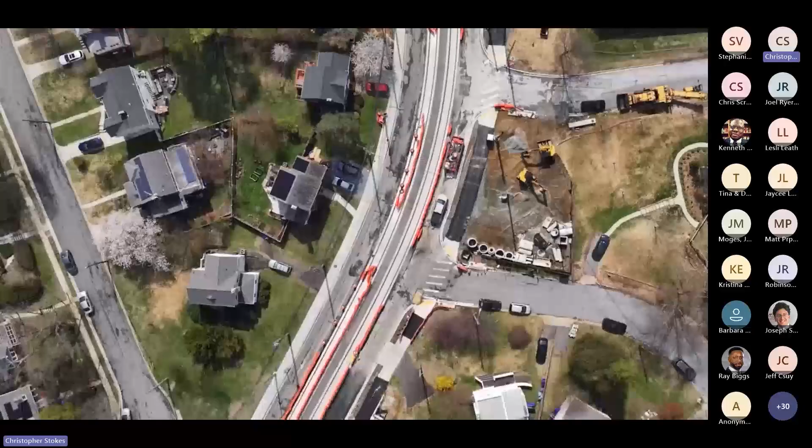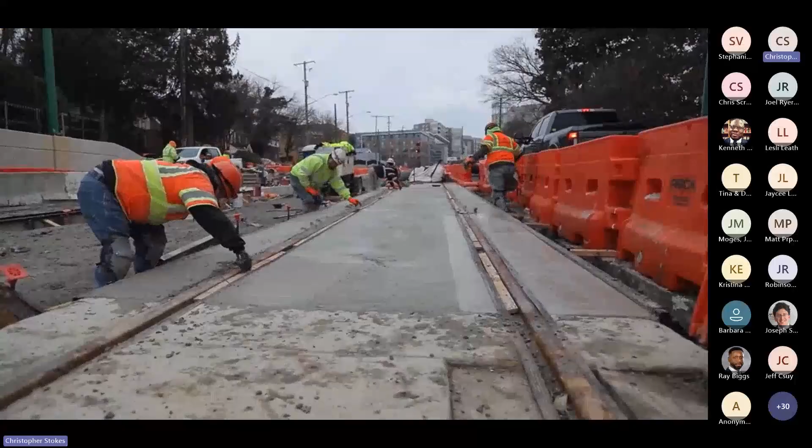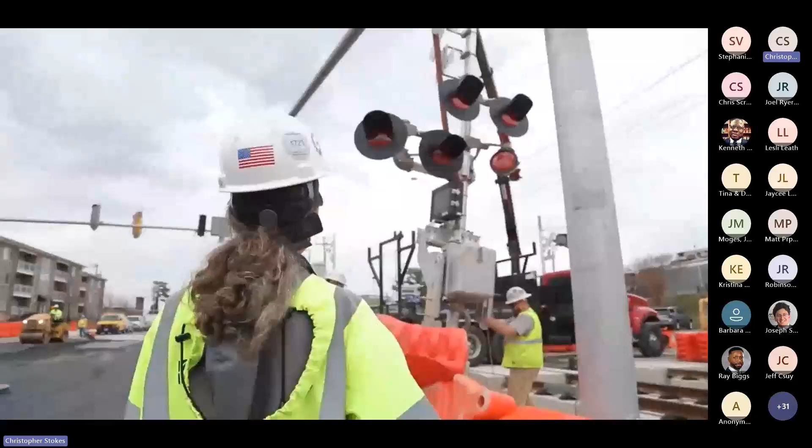Earlier this spring, Purple Line crews installed the final section of track on Wayne Avenue, an important project milestone. With the rails now in place, the project shifts focus toward the systems that power and operate the Purple Line, from the overhead power that energizes the trains to the communications networks that keep everything connected.

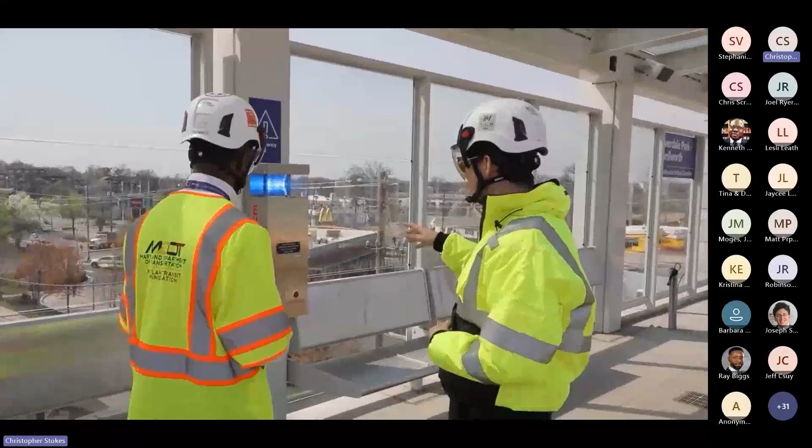This is where the railway really comes together. More than 1,000 live feed cameras, thousands of sensors, and integrated traffic control devices are being installed along the corridor. These systems communicate with stations, intersections, and pedestrian crossings to keep riders and the surrounding communities informed and safe.

Once testing is complete, operators in the control center will be able to see every light rail vehicle in real time and monitor activity across the entire system.

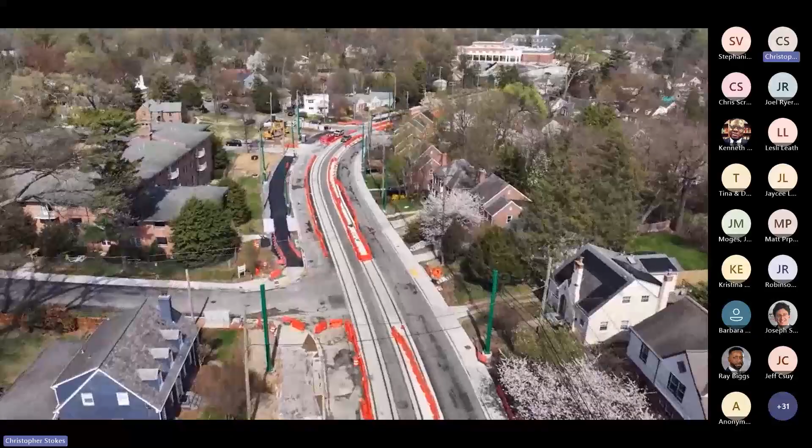Supporting those operations, the Lyttonsville Operations and Maintenance Facility is nearing completion. The facility includes additional storage tracks, maintenance areas for the light rail vehicles, and a backup control center to support trains as they move along the line.

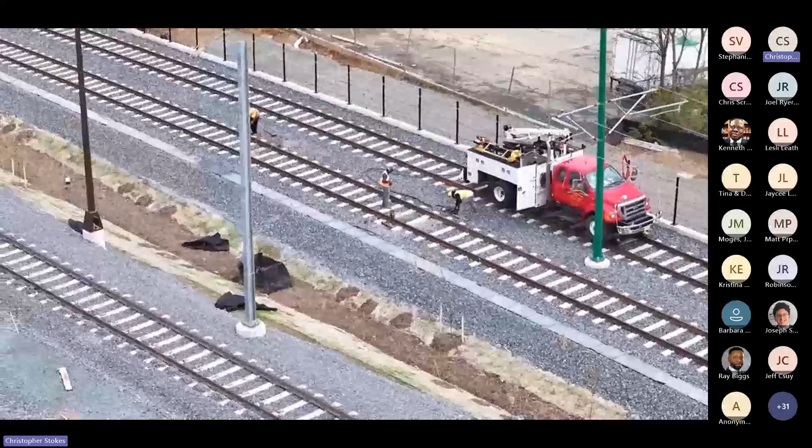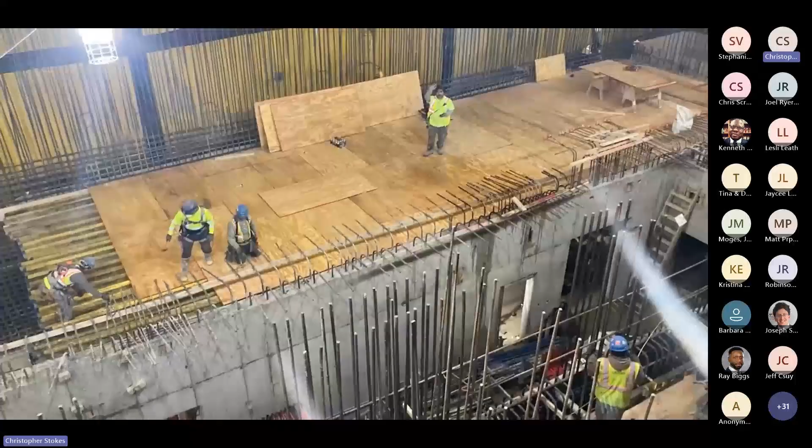In Bethesda, progress continues on the station lobby located just below ground level, as crews place tons of concrete for the elevators and the cavern, preparations are underway for the complex connection between the Purple Line and Metro's Red Line.

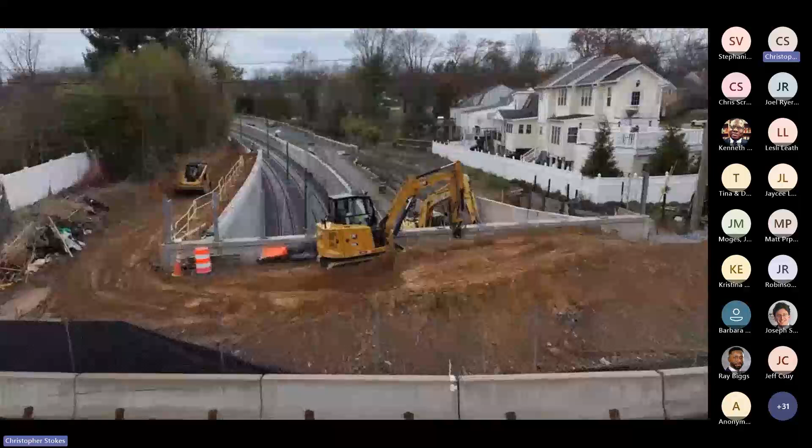Work is also advancing on the Capital Crescent Trail, where crews are constructing new retaining walls, installing drainage, and beginning paving operations between Bethesda and Silver Spring. Across the corridor, crews are also completing sidewalks, driveways, and other finishing touches that reconnect neighborhoods and restore the streets surrounding the new line.

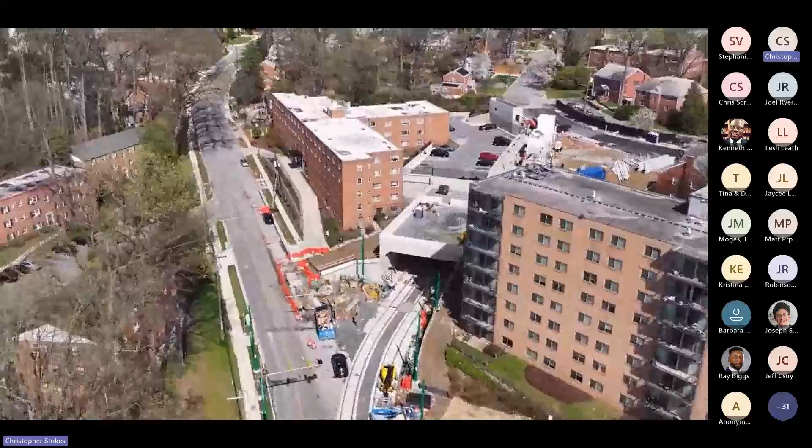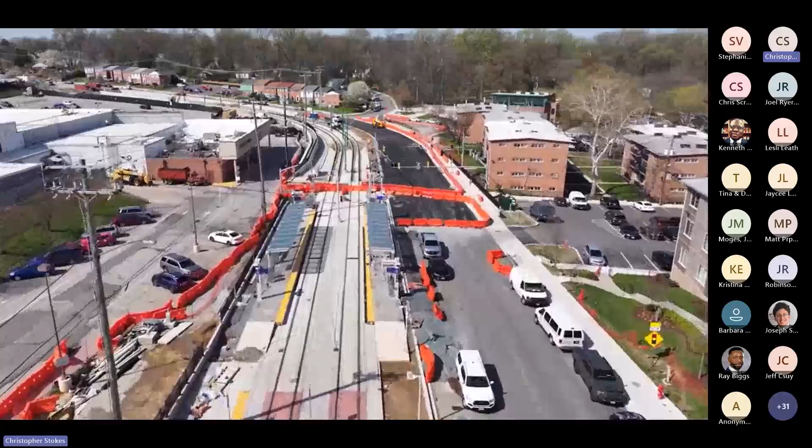Inside the Plymouth Tunnel, track installation is complete, and crews are now installing the overhead wiring that will power trains through the tunnel. With spring growth, the project's corridor will be turning green as crews plant thousands of trees and other landscaping elements along the alignment, restoring the corridor and enhancing the communities along the line.

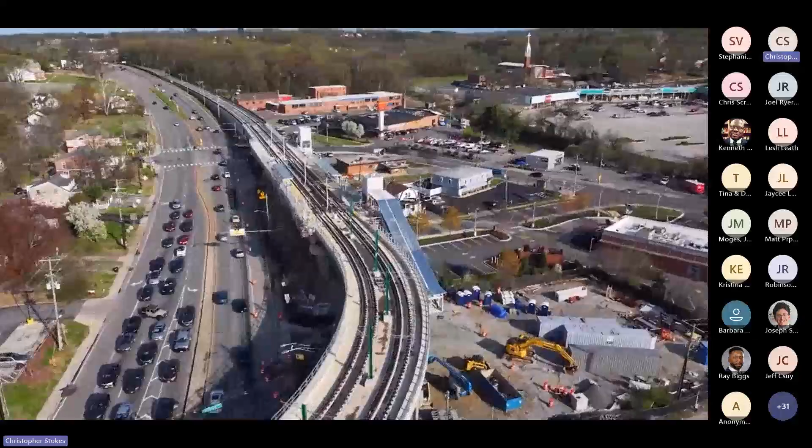Through the University of Maryland and Prince George's County, heavy construction is giving way to finishing crews and the installation of complex systems and utilities. The elevated station in Riverdale now has elevators and stairs in place, signaling its readiness to begin serving the public.

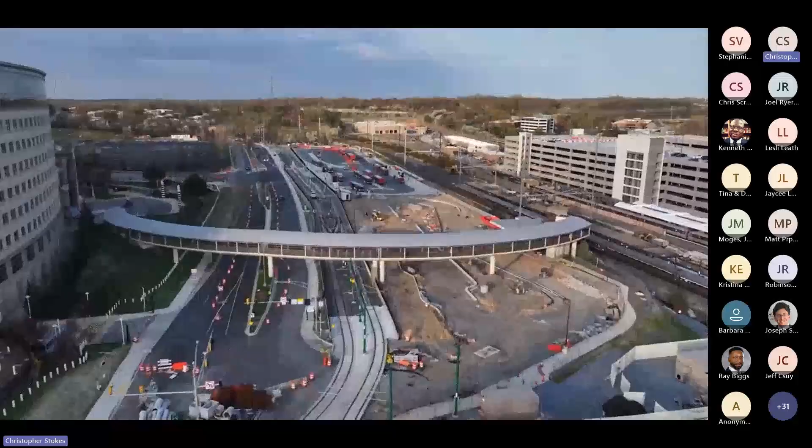At the Purple Line's eastern terminus, crews are also applying final finishes, and construction along Ellin Road is nearing completion.

Meanwhile, system testing continues along the Purple Line. Light rail vehicles have already traveled from New Carrollton to the University of Maryland campus, and testing will continue along the entire corridor in the months ahead. Testing typically takes place at night and is supported by maintenance of traffic teams and local police directing traffic to help keep everyone safe.

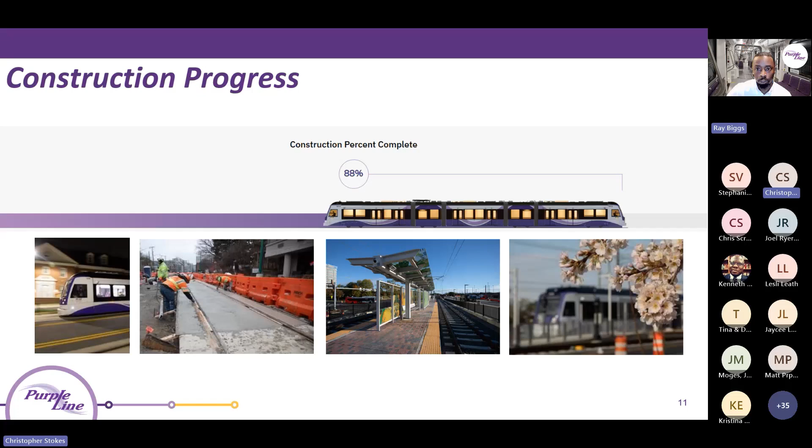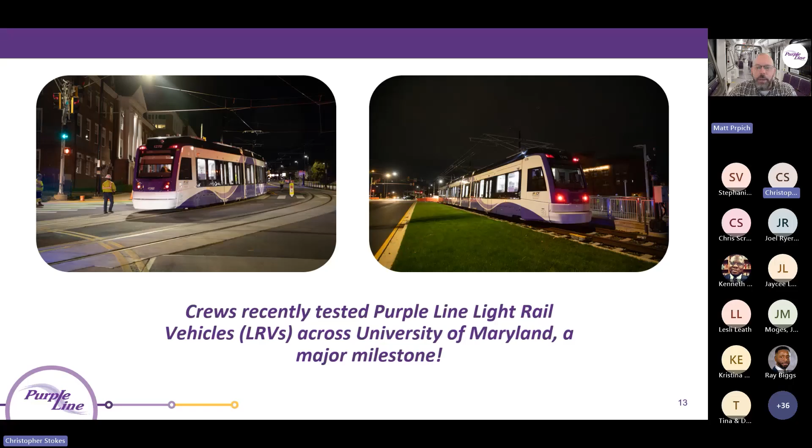Thanks, Ray. Good evening, everyone. Happy to share some slides of some testing and progress updates here. Some great photos of our testing on the University of Maryland campus. Very exciting time for the project to move the trains through the campus.

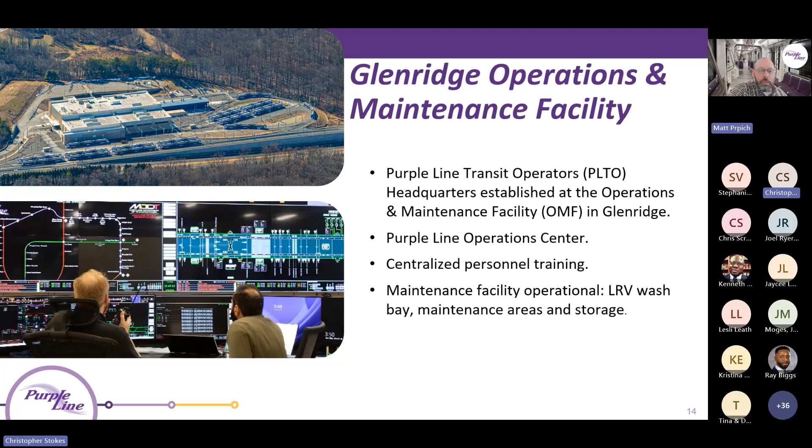Light rail vehicles: all 28 vehicles have been delivered and completed their initial testing, which includes safety elements, overhead power connectivity, LRV propulsion, braking, and communications between the trains and the operations and maintenance facility itself.

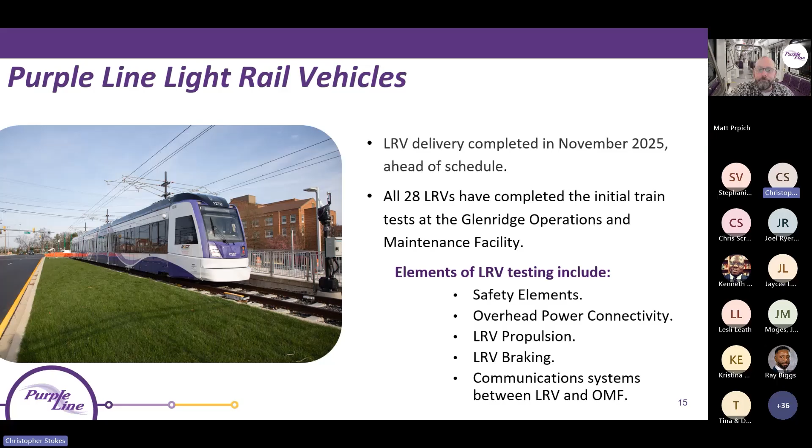Purple Line testing involves testing of the newly completed track and OCS wires, onboard systems, traffic signals, gates, and other systems to run the Purple Line.

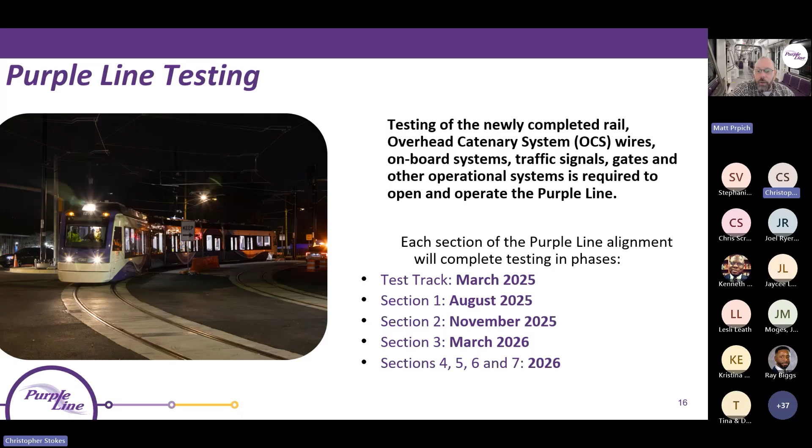Each section of the Purple Line alignment is completed in testing phases. We completed the test track last year along with sections 1 and 2. We're wrapping up section 2 right now and currently undertaking testing in section 3, with testing to commence throughout the alignment this year.

Maintenance of traffic during testing is of interest to a lot of our community members. During testing, and until we have all of the systems certified and operational, we will utilize maintenance of traffic operations, including police and flaggers and intermittent traffic stops to ensure we complete our testing in a safe manner.

Specific MOT protocols are developed for each test section and each intersection. Hours of testing are weekdays from 9 p.m. to 5 a.m., and this will occur through the end of this year. The public should consider the section live and expect to see LRVs periodically during these testing periods.

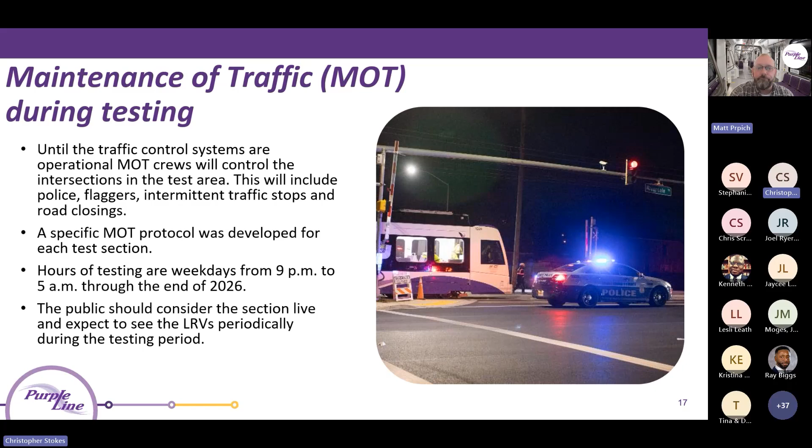Testing outreach: our outreach teams put a great effort forward to communicate the dates and times of the testing. Some of the methods they use are door hangers, on-site notifications with variable message signs, outreach coordination, in-person outreach to local businesses and schools and communities that are impacted by the testing, school safety presentations highlighting best practices, and ride-safe bike and scooter safety outreach programs.

We encourage you to visit the new testing and safety page on purplelinemd.com for more details. We also send public notifications to the outreach lists.

All right, last but not least, testing safety. During and after testing, the public should consider all tracks and OCS wires live and expect to see the LRVs periodically, day or night. Safety reminders: see tracks, think train.

Obey the traffic signals and always expect a train, and look both ways before crossing the tracks. Use approved crosswalks only. Do not walk on or near the tracks, and do not stop or park on the tracks. And a final reminder: our overhead catenary system carries 1500 volts DC. Please always assume these wires are live and carrying extremely dangerous electric current at all times.

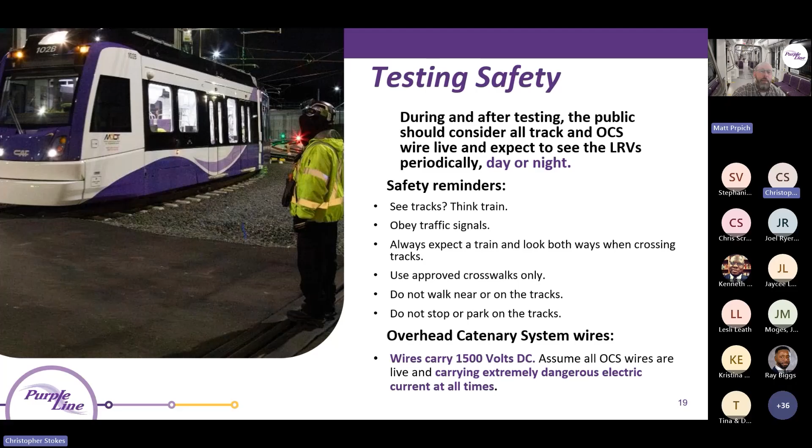On this part, the rail installation is completed from Colesville Road all the way to Manchester Place Station.

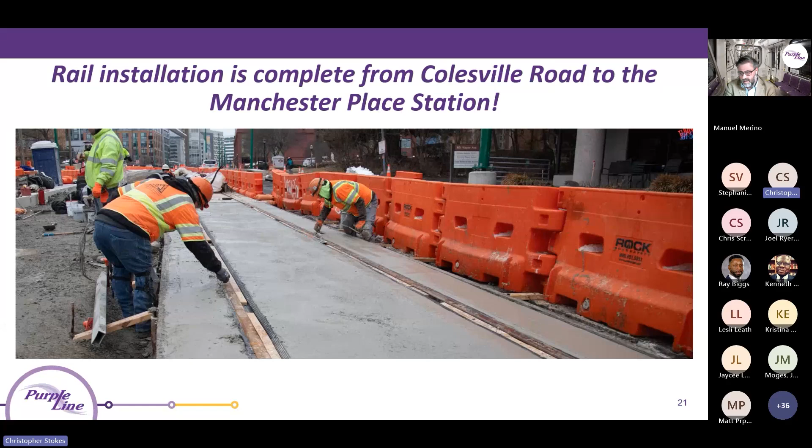On the Spring Street Bridge, we are making headway towards completion. We have completed the abutment, retaining walls, girder erection, and we have started some of the pours for the bridge deck construction. We are aiming to complete the deck construction, utility final relocation, as well as the pavement and roadway construction along the bridge by the summer of 2026. After construction, we will coordinate with the county for final acceptance and make sure everything is ready to open to the public.

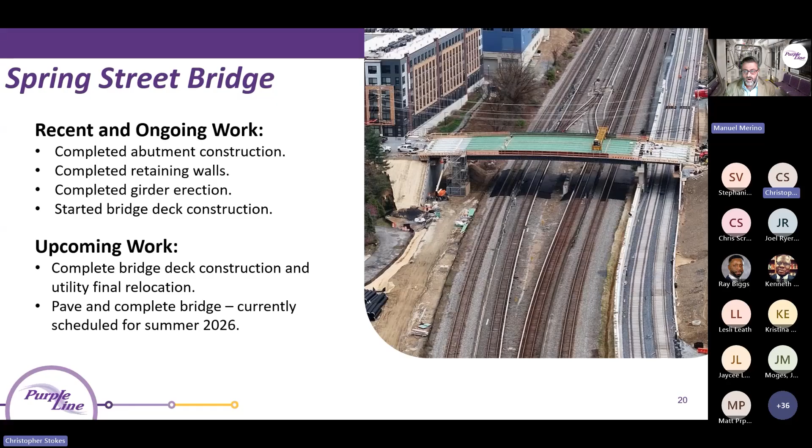Starting off with our Colesville Road aerial bridge: recently we completed all the track placements along the span of the bridge, as well as the safety railing that goes on the edge for the emergency walkway, and we removed the safety overhangs. For the majority of the bridge, we focused on the area over Colesville Road. There are a few areas we're still working on completing over the tracks, but that is progressing and will be done in the near future.

Upcoming work here includes continuing the CCT Bridge, Capital Crescent Trail Bridge, finishing the last span over there and the concrete placements on that deck, which should also be ongoing in the near future.

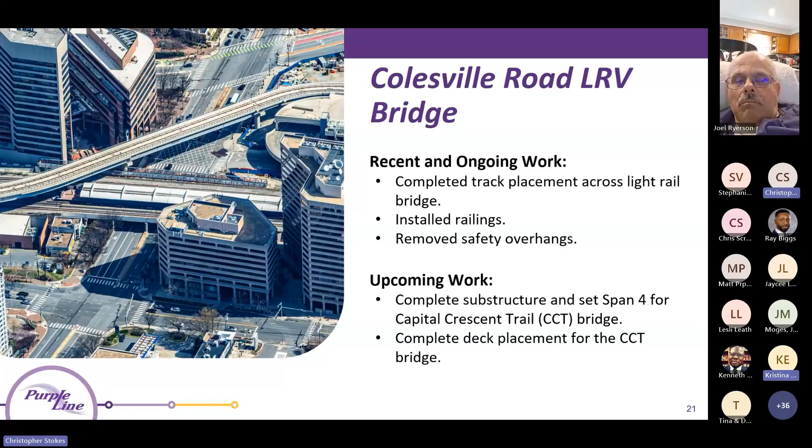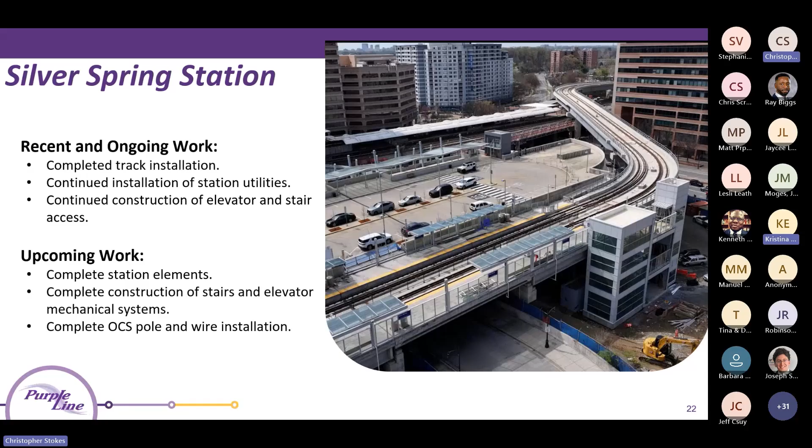We're still continuing several station elements: architectural finishes, joint sealing on the concrete, as well as the remaining punch list on the staircase, finishing up the handrail and guardrails, and finishing up the OCS poles installation and wire installation that run throughout the station.

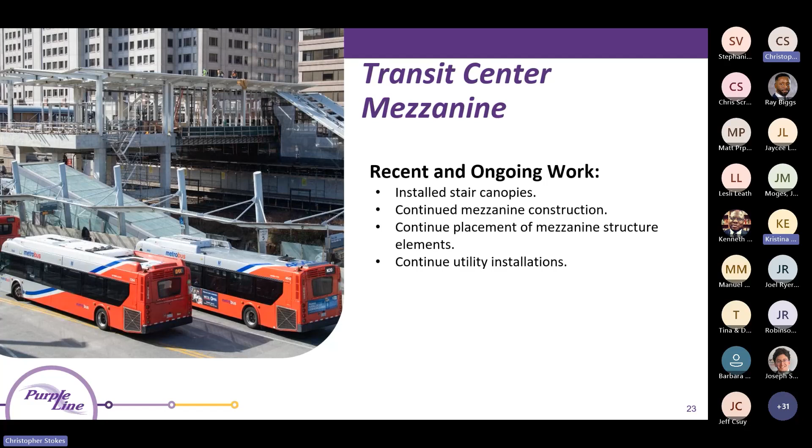At the SST Transit Center at the Silver Spring Metro Station, we are continuing to install the structural steel for our stair canopies and overall overhead canopies. Our construction here is still ongoing. We're still working on some architectural concrete and other station elements, architectural finishes, glass cladding, and the different elements to get this all up and running, as well as our utility installations, final electrical feeds to the stations, the storm drainage system, and the sanitary connections. And next we have Ricardo, who will go over the other areas.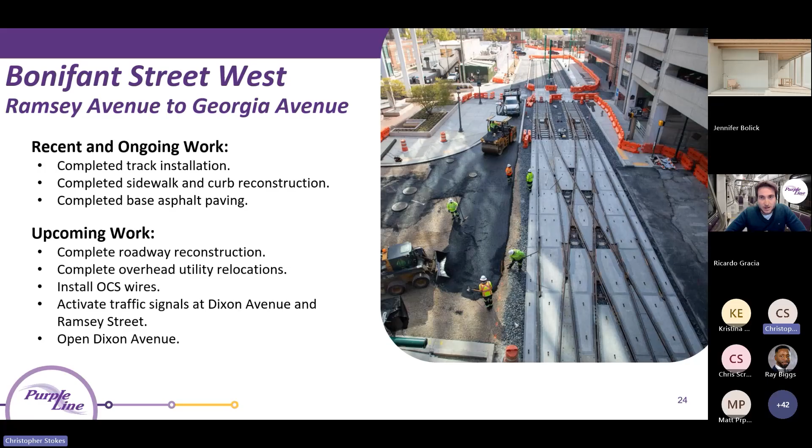I'm sure there are a few businesses that are going to be affected. PEPCO already did the communications to all the affected neighbors, and our outreach team has been contacting the different businesses, but I wanted to mention here to everybody, just in case somebody didn't get it.

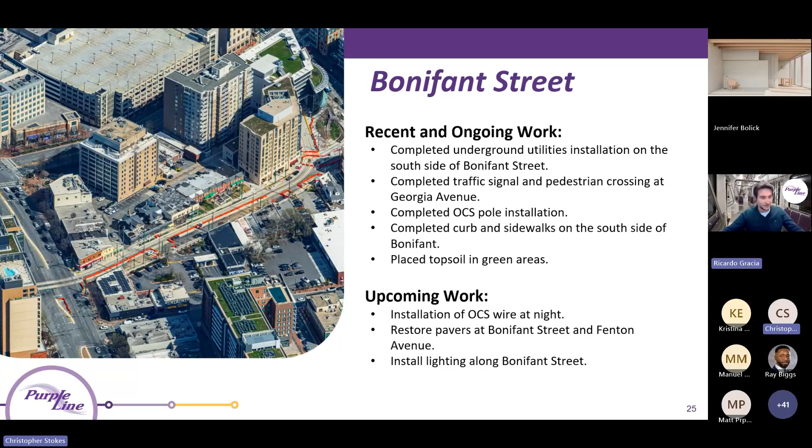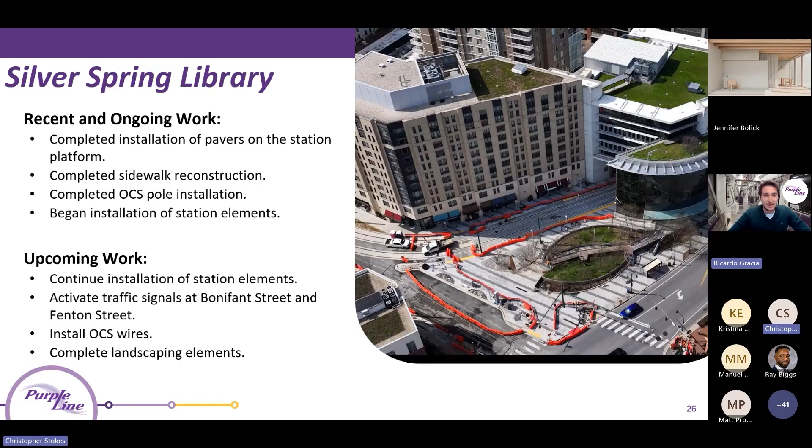In Silver Spring Library, we have completed the installation of the pavers on the station platform, the sidewalk reconstruction, the OCS pole installation, and we already began the installation of many of the station elements. We still have a couple station elements to complete, and we will be activating the traffic signals and permanent configuration at Bonifant Street and Fenton, installing the OCS wires, and completing the landscape on the south side of the station.

In the intersection of Fenton and Wayne, we completed the curb, sidewalk, and roadway improvements and installed all the OCS poles. We have 3 corners where we still need to restore the pavers, and we will be doing the final paving and installation of OCS wires starting this summer.

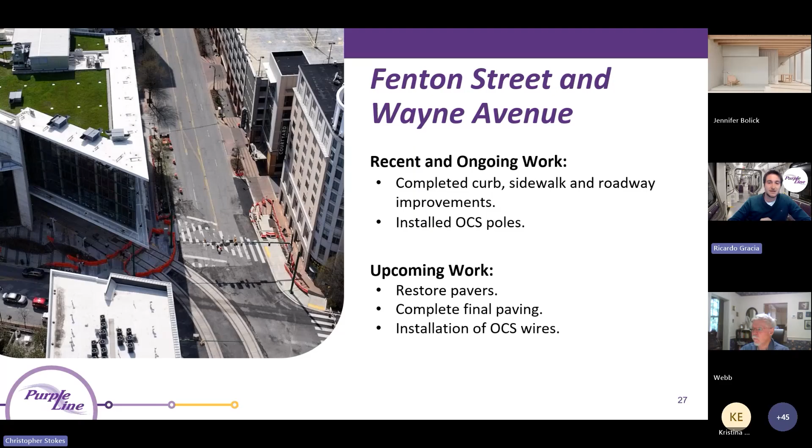In Wayne Avenue, between Fenton and Dale Drive, we have completed the track installation and OCS pole installation. All the stormwater system and sewer is in. We continue working on the driveway and sidewalks. Most of them are currently done. The last couple pieces pending are mostly at the Cedar intersection.

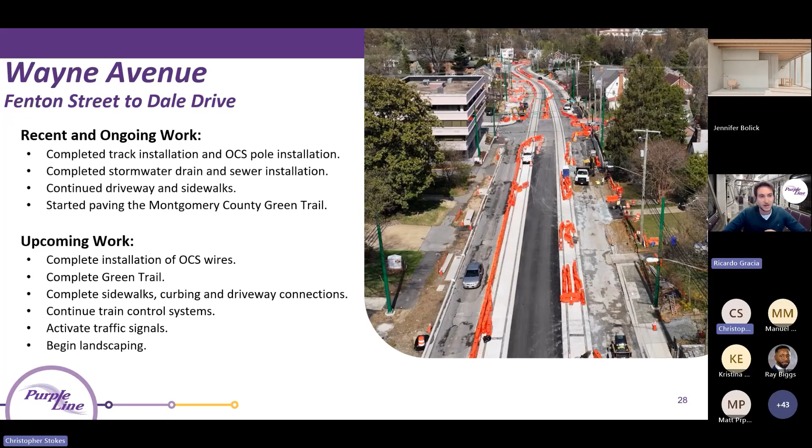Coming up, we have to complete the installation of the OCS wires, a few stretches of green trail that are scheduled to be completed very soon, the sidewalks, curbs, and driveway connections, and we will be continuing throughout the next couple of months installing the train control systems and activating the traffic signals. Also, starting this spring, we're going to begin the landscaping.

Between Dale Drive and Sligo Creek, we completed the sidewalk and roadway construction, installed all the OCS poles, and continue working on the TPSS, the traction power substation, by the school, and the systems installation. Coming up, we're going to be shifting the traffic to permanent configuration and removing concrete and water barriers. We will be finishing the last couple sidewalks and curb reconstruction we have. The installation of the OCS wires will also happen at night, along with the milling of the asphalt. Finally, we'll also activate the traffic signals under the permanent configuration.

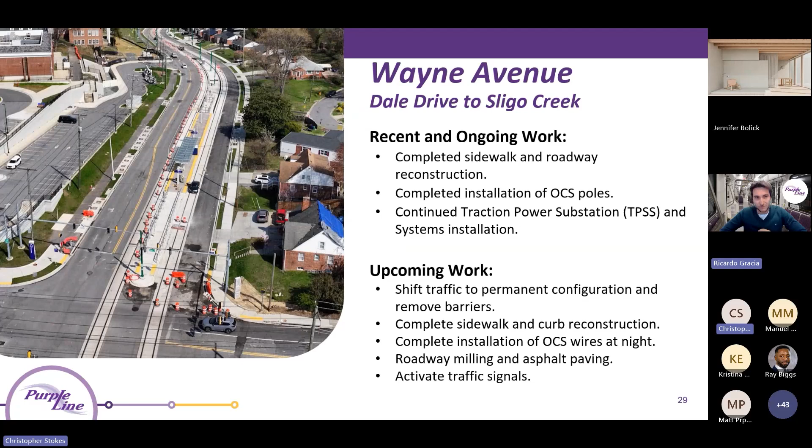At Silver Spring International Middle School, we completed the stormwater management facilities. There are 2 ponds over there in the school that we finished last summer. We installed all the OCS poles as well. We continue the utility work and other system work at the TPSS, and all the curb, sidewalk, and roadway restoration. Coming up, we will install the OCS wires, the landscaping, and the final pavement and pavement markings.

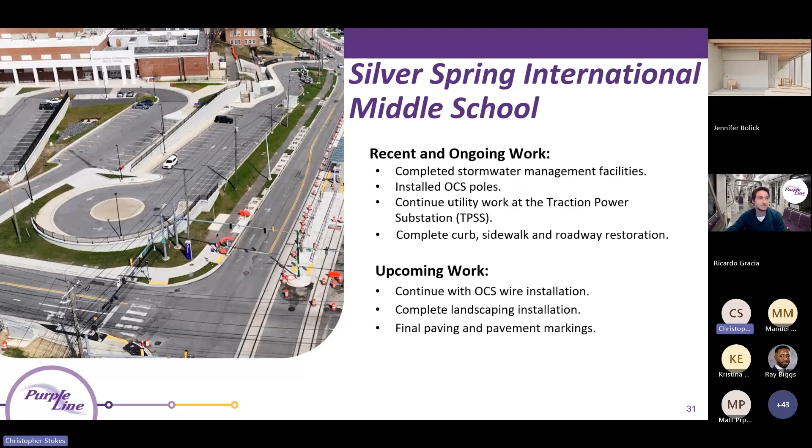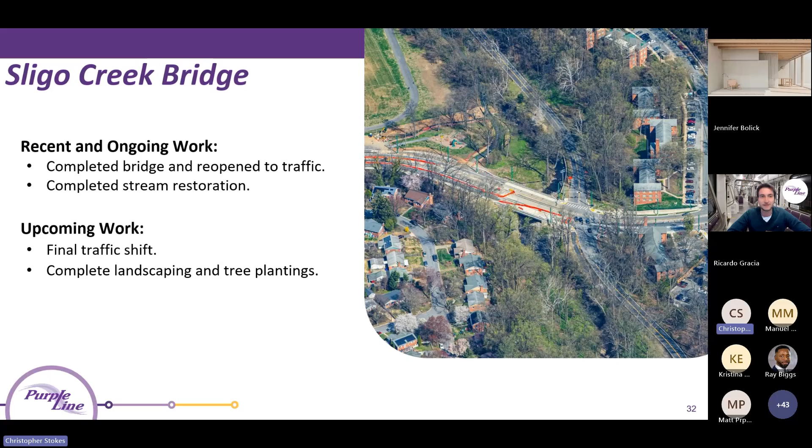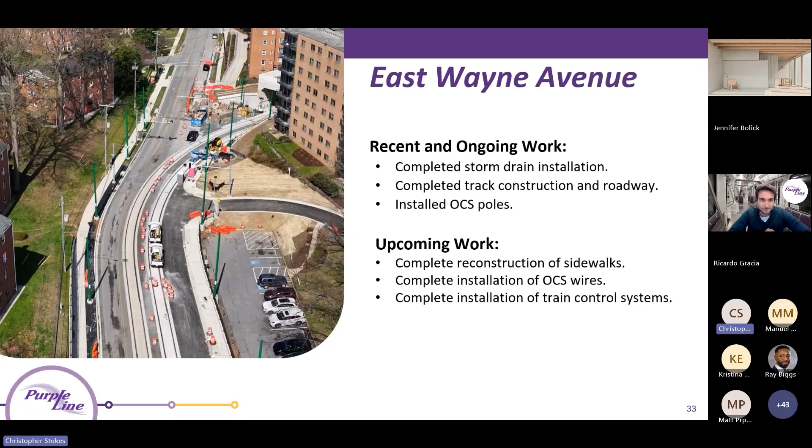Okay, I'm going to pass it back to Chris. Thank you, Ricardo. Or to Ray. Oh, sorry, to Ray. Okay. You're all good, Ricardo. Thank you for giving that construction overview.

Switching to business engagement, our Purple Line Business Relationship Manager, Leslie Leith, works with the business engagement team along the alignment, alerting them to construction impacts and providing advanced notifications in English and Spanish. This outreach is aimed at minimizing disruption and maximizing awareness. Additionally, our team promotes businesses on our website, our monthly newsletter, and social media platforms. I invite you to visit our YouTube channel to see some of the business spotlight videos posted there.

The Purple Line Small Business Grant Program, administered by the Secretary's Office, Maryland Department of Transportation, began last year, and $2 million has been awarded to over 180 small businesses. The application period for the second round will open on June 29th, and online applications are due by July 31st. The application period for the third round will open on October 12th, and online applications are due by November 17th. Don't worry, you do not have to remember all of this information. You can find more information and the application link on our website at purplelinemd.com.